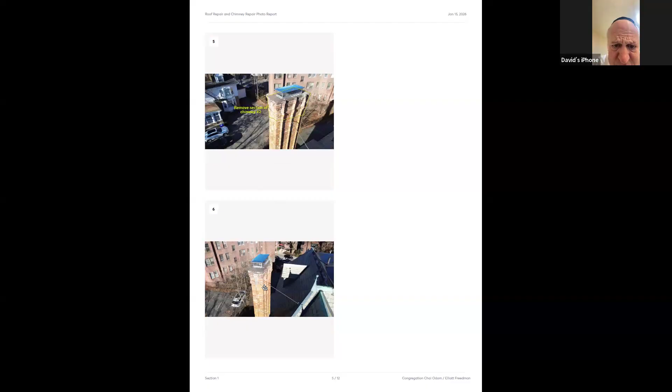You can see with the, what color line is that, Nick? I can't see on my screen, but it's a line it's going to be cut down to. Maybe what color line is that? Looks like yellow, a yellow line. I'm so sorry, yeah, I'm on my phone.

So we're cutting it down just a short bit. Now, I'll address the one that really needs to be cut down, which is the one on the side of the driveway. Even if they fix that and rebuilt it up, it still is a danger, and it has something holding it up, which is this metal thing.

This is a very old building. The purpose of these statutes and laws, as I've read them a little bit, is to preserve the beauty of the building. Now, if you can only see something from the sky, that doesn't fit into the purview of this committee, nor of this law. The other 2 chimneys are set back very much, and you can't see the entirety of them from the street. We didn't even know how bad it was until we got a zoom up there.

I assume this committee is not here to preserve something you can only see by Zoom. You want to preserve something you can see by the street. Now, the lower part of this can actually, strangely enough, be seen. The topography of this neighborhood is that the building is set up a little bit high, and the whole land of the building is high, and then it slopes in a couple of spots. So you can't see up that high no matter where you stand.

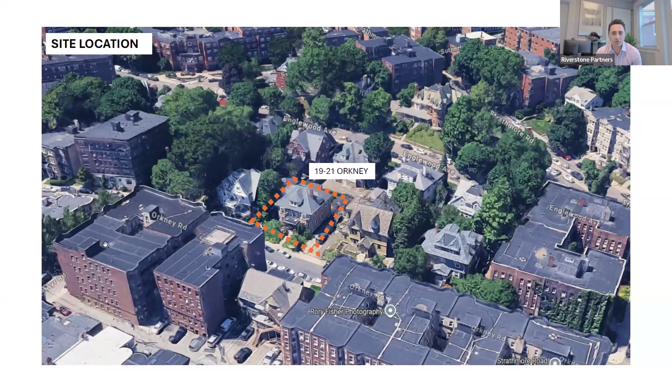Nick, you can just go through the slides. As you can see, it's a beautiful house that has been neglected for many years. The exterior siding, old windows, and there's some original features of the property that they maintained, and there are a lot of things that were added to it.

On the back side of the house, as you can see, there's a big red porch that has been built and a fire escape. These features are not visible from the public road from Orkney, and because this property is sitting a little bit lower than the street behind it, they are not visible features.

We do have, as you can see, a garage that has been used as a shed and is falling apart. Part of this application, we are requesting approval to remove that.

General notes about this project: the majority of the work we are doing is inside of the building. We are not doing any exterior demolition. We are not doing additions. We are not expanding the building, adding dormers or skylights.

As a resident of Brighton, somebody who has been in this area for several years, I understand the neighborhood very well, so everything we are proposing is to respect that.

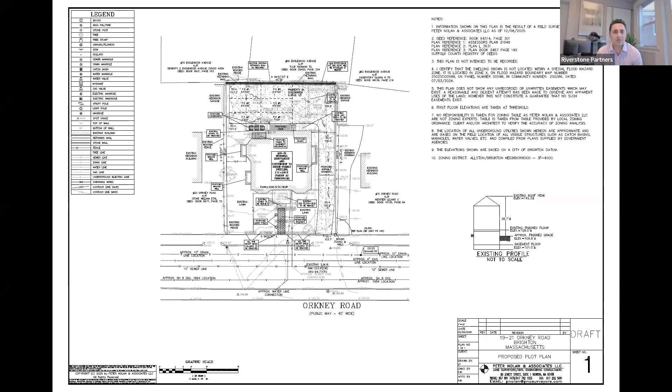This is the site plan, which basically shows that the building is going to stay as is. We do have a driveway that is located on the right side of the property. That driveway is going to stay, it gets resurfaced, and then that will be an opportunity for residents to park behind the building. Right now, behind the building, Nick, is it possible that you zoom in a little bit on the back side of the building?

Was this helpful? Yeah, this is great. So as you can see, back there right now, this doesn't show the overlay, but that red deck that you see, that's gonna get removed. And we will create some parking back there, which basically allows the residents to have some off-street parking in part of Brighton that is really hard to find parking.

The rest of the property is - if you can go back for a second, I just want to do a quick overview of that - the rest of the property is grass, we don't have any intentions to change it. As you can see on this landscape plan, we are showing a mulch bed around the property to make it look nicer and add some soft edging.

In the back side of the property, between our parking and the garages on both sides, we are showing a small landscaping strip to allow for some shrubs to be installed, generally just to improve the look of the property. But again, all of these are on the back of the property.

On the front, we do have a walkway to the house. It's concrete, so we would like to just replace that with pavers. We are showing lighting, there's some more details about that Nick can explain. Per Nick's recommendation, we are adding a native shade tree to the front left corner of the property, and then there's some existing vegetation that we're gonna maintain.

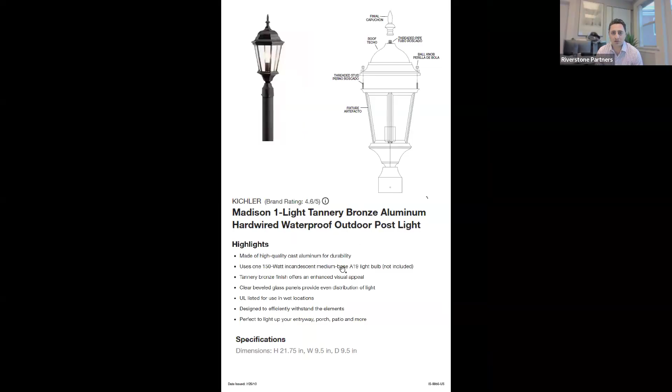Yeah, you can skip through these, they're just the specs we've shared. For windows, we've made a recommendation, and again we can talk about that. The roof is asphalt shingle, so nothing really to look at. The lights in the front—this is what I thought would be appropriate and would look nice along the front walkway, but again we don't have a preference. We can eliminate that scope or keep it, it's just a recommendation.

Nick, tell me what you think. I do have with me Chris Willander with James Hardie. Chris has done a lot of historic projects in several cities and towns. He has a presentation—if you feel it's appropriate now we can go through that, or you can read your recommendations first and then have Chris go through his presentation after.

All right, anything else, Ari, before we move forward? No. Okay, so let's stop there.

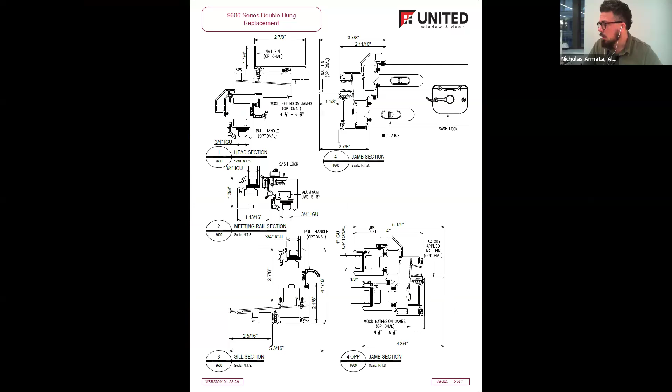Commissioners, if you're okay, I'll read my recommendations, which I've already presented to you, but we can go over them on the record. Then you can debate all of the individual components, and I will keep track of our comments here. When it comes time to vote, I know there are a lot of different elements to this project, so I'll keep track of everything one by one to make sure we get everything into the decision letter. Does that sound good, Sharon? Yes, it does, thank you.

Okay, so I'll do that now. 1921 Orkney Road: the structure is a two-story clapboard-clad colonial revival built around 1897, historically known as the Horace B. Fisher House. The property has seen several historically insensitive changes over the years, including but not limited to alteration of the front porch, addition of a metal fire escape at the rear, and removal of the original sidelights, replaced with architecturally inappropriate vinyl stock lights, to name a few. Regardless, the property still possesses a large degree of architectural integrity.

So now I'll go through all of the individual components Ari listed in this proposal. Number one, the window relocation on both sides of the facade—staff is recommending approval. When reviewing window relocation or changes, it's recommended that character-defining facades remain true to the existing character; however, it's staff's opinion that secondary facades, meaning the two side facades in this example, can be relocated to allow room for negotiation. In this case, these windows are not character-defining and the proposed relocation would be minimal. Additionally, there are no sister properties near this property, meaning the facades don't have to match adjacent properties.

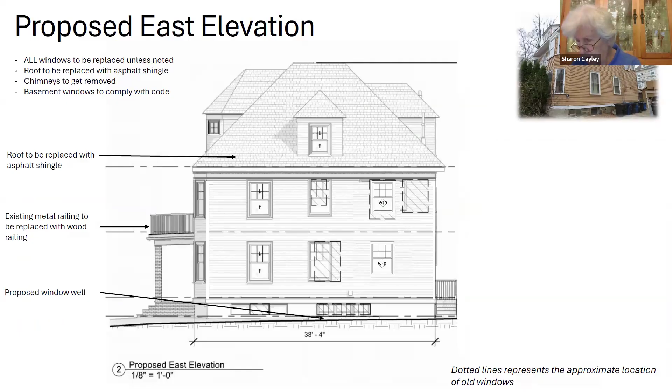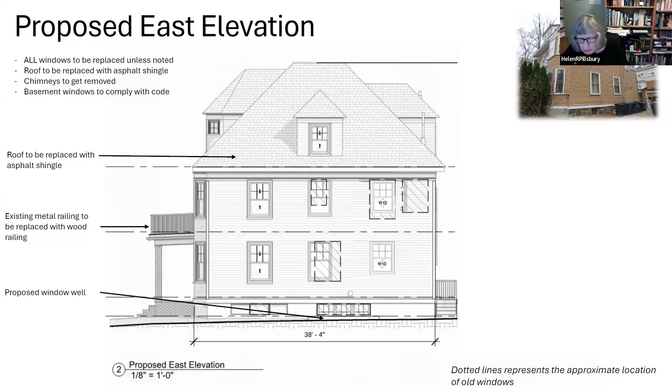But correct me if I'm wrong, other commissioners? I guess not to complicate things too much, but those window wells seem to be somewhat related to the placement of the driveway. That's kind of a separate issue, but to me they're interrelated. I don't know if we want to get into that now or wait till we've done all the facades of the house.

In concept, in terms of the well, are you comfortable with that right now, regardless of the driveway? Because then we can go to the driveway and discuss that after. Yeah, actually, I am personally comfortable with that. Let me solicit the other commissioners.

I think Helen and I are on the same page, because I was thinking the driveway and that sort of green strip that's next to the driveway. So as long as it doesn't interfere with that, we can discuss the driveway in a separate topic. Okay, great. So we discussed the east elevation.

Now let's move over to the rear elevation, which you could probably see glimpses of from Englewood, but there's also a lot of improvements on this side. Any comments or concerns about the rear elevation? No, none from me.

Will there be the red kind of deck that's in the existing conditions photograph? Will that be replaced by a small exit deck? Is that what I'm saying? That's what I saw. Exactly, Helen, you're accurate. And what are the materials of that deck? Because I don't know if that was specified.

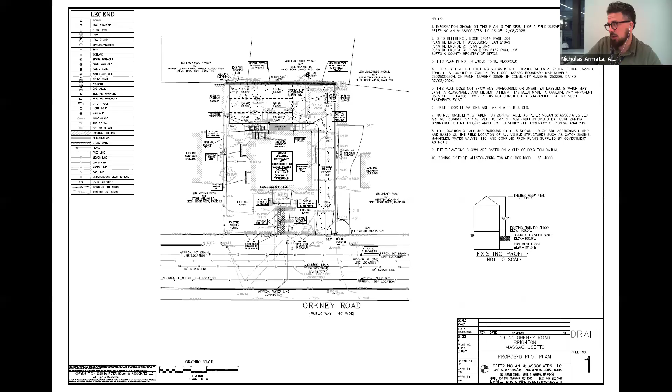Okay, so let's pivot to this facade, the west facade, which has one window relocation, then there's a window well here, and then also another window relocation on the basement level as well.

Well, I would observe two things, and it might not be big, but the window relocation lines up to some extent with the third story windows, so visually it's somewhat balanced. The other is that the window wells on that side appear to line up with the second floor windows, so if you're really looking at it very closely, it balances.

Good, just pointing out details here. So Ari has proposed, A, keeping the existing large tree, and B, shielding these wells from visibility from the street with several shrubs that will grow in over time. So that's another way of screening these wells as well.

Yeah, it's commendable to have as much planting as possible, given that in the last few years we've had some weather events that cause us to give greater attention to water runoff and where to put the snow when we get it.

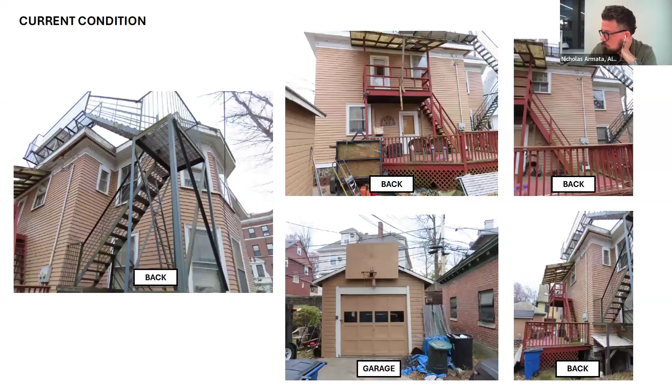So let me go to the best graphic to show here. There you go. Okay, Ed, you're suddenly muted. Okay, sorry.

I'd like to start the discussion by observing that the front door is the most prominent part as you approach the building, so as much as humanly possible, keeping it historically accurate is desirable. The side lights look like they've been added at some point in the last century, but not the best part. I realize fitting a door and side lights that aren't manufactured together can be difficult, but living in a place that's 100 years old myself, I know that nothing is ever level or plumb.

So it's a fact of life. In that case, I would like to recommend that the developer do whatever they can to get as historically accurate a door and side light as is humanly possible, and not a modern reproduction. That is, however, my observation. Commissioners, the floor is yours. I couldn't have said it better.

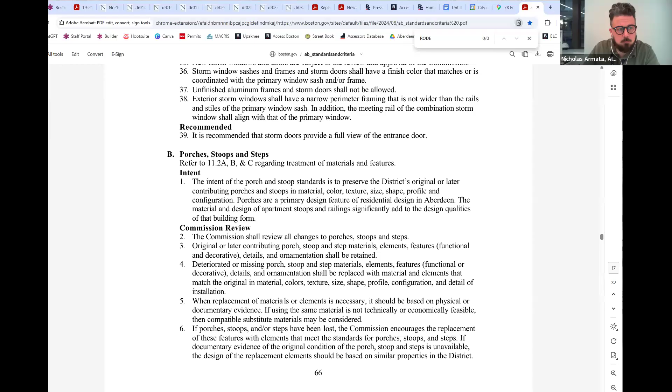Let's bring this up. Hang on one second. Share new screen. Ari, who was it that needs to unmute? I think his name here is Chris V1. Chris, you should be able to unmute yourself. It looks like he's on a phone. Is that the star? We'll unmute him. Star 6, correct.

There you go, perfect. Good evening. Evening.

Apologies here, my wife is traveling for business, so I have a one-year-old and a three-year-old alongside me that might be contributing if you hear any noise. But my name's Chris Valandre. I work for James Hardie Building Products. I've been working in the greater Boston area with Hardie Siding for the better part of the last 8 years.

I have run into my share of projects in historic neighborhoods, and I have been involved with a few other projects with Amir over the years, and I was helping him with this project, the design and all the different parts and pieces. You can continue to advance the slides here.

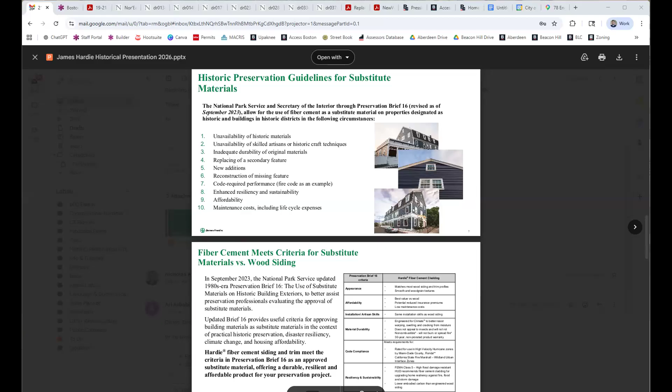If you go down a few more slides, these are local examples. This is a large commercial building in Medfield. There was one in Salem, one close by in Newton, Brookline. We were able to get Hardie approved on all of these. There's dozens more, but these were the most recent ones I had available. And then at the end, I included a case study down in Washington, D.C. Totally different market, but very historical, significant area in the Northeast. I wanted to include that for everyone to see.

Is that it, Chris? That's it, unless anybody has any questions.

Thank you. And commissioners, I want to clarify something Chris said, because he brings up a good point. The Secretary of Interior standards does allow for new alternative materials on a case-by-case basis. These are the new national standards for preservation. That being said, we have our own individual guidelines that explicitly lay out the preference for original materials, and also the ability to consider other materials on a case-by-case basis. So Chris, thank you so much for your input. Commissioners, any questions for Chris?

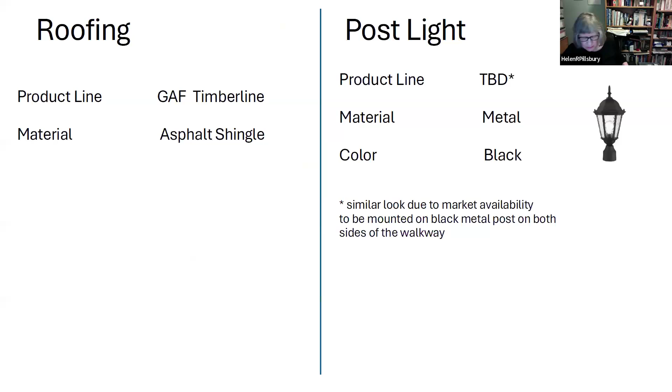So I think the next recommendation was to do 1 of them instead of 2. It's a pretty pleasant looking light, but I don't want to take up the commission's time on that. It just seems a little unbalanced to have those 2 poles on the right side, and a bit obtrusive of the view of the facade of the house. That's just my comment. Yeah, we can eliminate it or just make it 1 to simplify everybody's life.

I would like to recommend that we eliminate them. I don't think they're necessary since there are going to be porch lights.

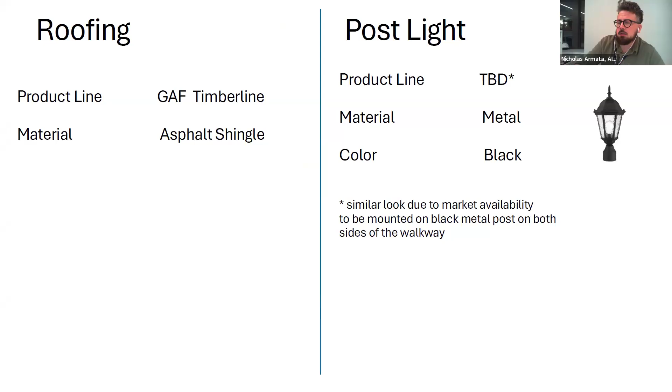Sure. All right. The description says on both sides of the walkway, but the drawing shows it on the same side. Yeah, that's a good catch. I apologize, this one is outdated.

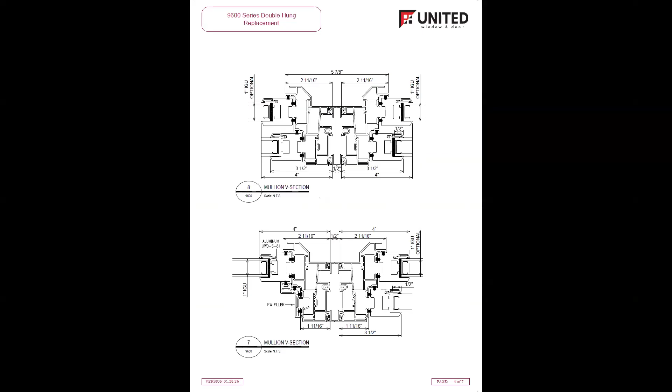Jesus Christ, I don't even know where to begin. I mean, I really don't. I'm too nervous because it's putting me on the clock. The whole format of the meeting is such that it disadvantages the commenters, the people who live next to this house and in the neighborhood. There should be at least a chat opportunity so people can drop a sentence or two that informs the conversation. Ava, this is how the state set this up. I'm here to help you, let's start with the things.

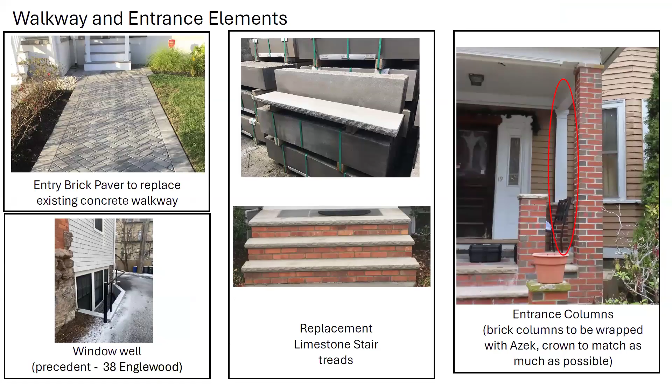Okay, all right. Can we see the slide? Can we see the slide on the front door, please? There are other issues that are more important to me as an abutter, but I care about the street and the front facade of this. And I think it would be a huge mistake, really an abomination, to leave the current, not original, sidelights that don't even fit in the original openings.

It's Helen's idea to essentially put new proper size panels, windows in the existing opening - that's a good alternative. But I just want to point out that the stoop of this entire door element, because originally it was one assembly, right? They ended up painting the sidelight parts white, but originally it was one assembly of the same color, and it was installed probably even as one assembly.

The stoop at the bottom is so worn that you cannot sell condos to people and stick them with a stoop that is totally worn out and where the door doesn't fit with the sidelights. It'll just look inappropriate, in my opinion. But I don't want to spend any more of my precious minutes on this. I just want to point out that inside this vestibule, and I was there a number of times, it's a tiny vestibule that's only 4 feet deep.

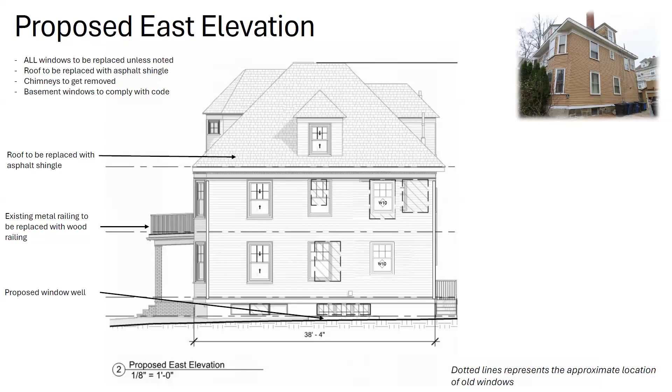Maybe we can move to that facade in the rear. Can we move to the facade? We were just arguing that we really would not like to have an additional window opening on our side, on this facade, which is visible from Englewood, and I walked there and could see that according to this drawing,

almost half of this facade will be totally blank and looking off balance. We are hoping that this window, which has always been there, can be retained, because it also allows future residents to look into the back where their cars will be parked.

And if there's anything going on, whether it's a fire - there was actually an instance of fire in the house behind, and it was stopped because our neighbors at that time saw that fire. So I'm asking, please, there's no reason to remove that window on the first floor of the rear.

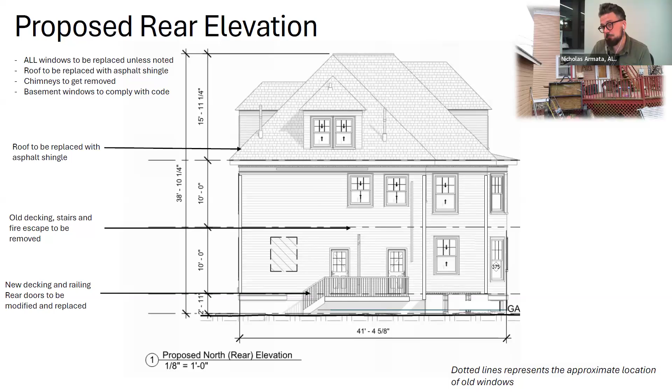Okay, I'm sorry, but Leland's comment made me realize I'm not clear about the trim material around windows or some of the other areas where there's trim. Do you want to elaborate?

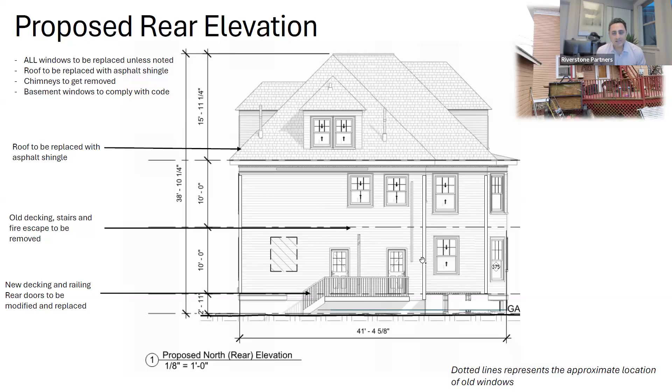Is that like the Aztec? I know I keep saying the wrong thing. Yeah, AZEK. It's an alternative to wood that nobody uses wood around windows for anymore because of water damage issues. The good thing about AZEK is there are different profiles, so we can find something that matches what's existing out there. It's commonly used for situations like this.

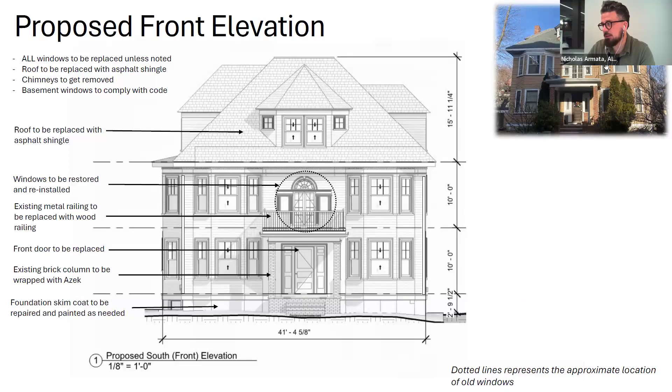What about the delicate dentil work on the upper trim areas near the roof line? Would that be able to be replicated identically? Because the commission will probably ask for that. Yes, and if we cannot replicate it, we will keep it and paint it.

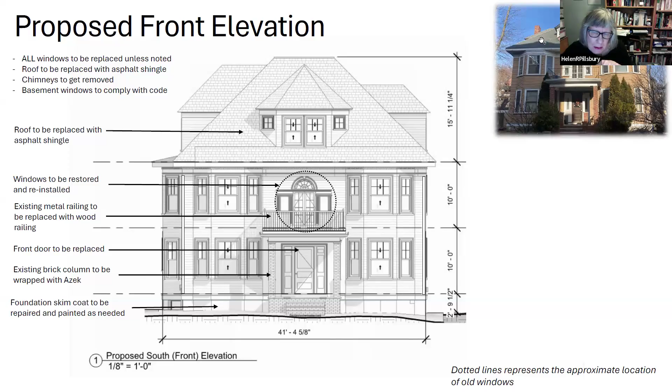I also want to ask, following from Eva's comment, about the windows flanking the double door windows under the Palladian half circle that she said are currently leaded glass. Is that true, and will that be retained or restored with leaded glass? That's an important detail. I'm not sure what they are, but we are going to restore them in kind. We'll have a historic window restoration company come in and basically do whatever is out there in kind. So if there are leaded glass windows, they will remain.

If leaded glass windows are still being built today at this time and age in New England, the window restorer will do that. But if it's a practice that has been phased out, then no, we can't replicate it.

And I want to add this: this is our house, we love it more than anybody else. So I understand the commission has opinions, but we care about our house and the look of our house more than anybody else. So if we are making a recommendation, it's truly what we want the house to look like.

Thank you. I just want to point out that a lot of our recommendations are based on guidelines and rules in place that we adhere to. So if a lot of the things sound arbitrary, it's because there are rules as far as materials and things like that. It's not even a matter of opinion, it's a matter of passing along to you what the guidelines and rules are about materials and things like that. Understood.

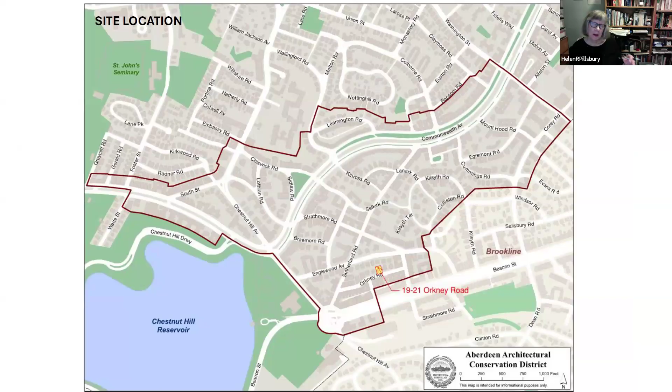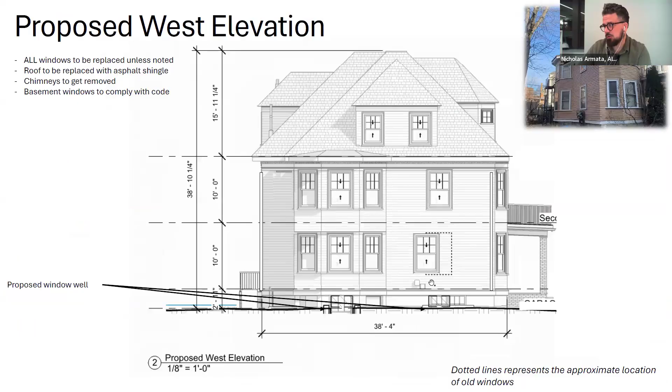But can we just specify, does that buffer come all the way to the street, or does it stop somewhere? In the public comments there was discussion about that. I don't think so - I think it came to the end of the residence, that was my recommendation from staff. And is there any paving separating those driveways, or is the pavement just brought up to the edge of the driveway?

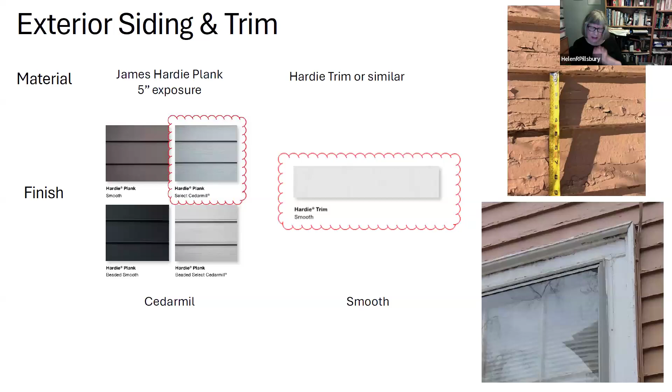Sorry, I don't follow. It was from the public comments. It was recommended to have a paver, because the driveway next door and this driveway are kind of next to each other, to have a paver in between. We didn't really discuss that, but I didn't want to leave it hanging. Wasn't that part of the discussion on the perceived angle of the driveway as it enters the street? But we were told by the developer that that is not the case - it's going to be a straight shot.

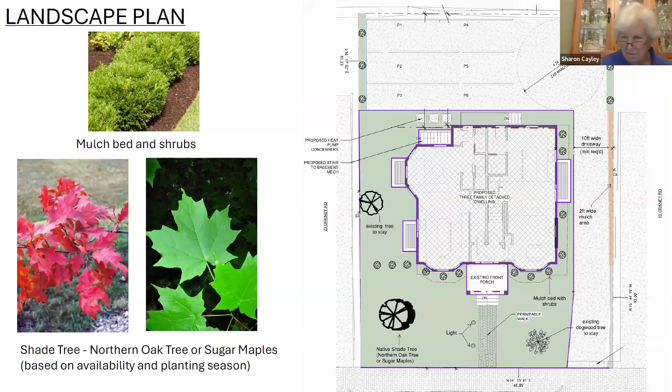That does it. That's great, Ari, you're all set. I will get this put together in a deliverable and send it over to you, and we will schedule that site visit for the Hardie board siding. Sounds good, thanks for everybody's time, it was a pleasure meeting you. Thank you for your time. Okay commissioners, don't go anywhere, we have a couple more things to take care of. Almost done though, thank you. Thanks, Ari.

All right, moving on to administrative review items.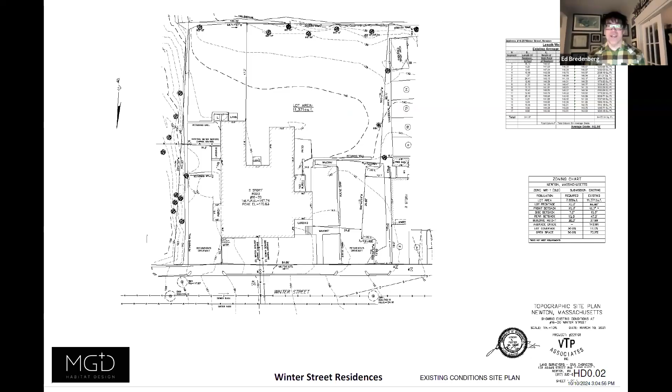Almost there. Appreciate everyone's time tonight. While you're finding it, I'd like to thank the members of the public for also chiming in. On a lot of things, I really take the public comment to heart, as far as materials and things like that.

Nicely said, Ed. All right, we have one administrative review item. It's application 25.0995, 8 Chiswick Road. Replace all 8 windows with 6/1 wood, simulated divided lights, with exterior and interior applied muntin bars. No low E glass, at a 6/1 grid pattern.

This is conforming, yes? Yes, ma'am. This property has done these before. Yeah. Okay, so all in favor? Oh, we need first and second. I'm sorry, I'm jumping ahead, getting late. I'll put forth a motion to approve it.

I'll second it. Sorry, and then public comment. If anyone has any comments on this application, raise your hand. Going once, going twice, none.

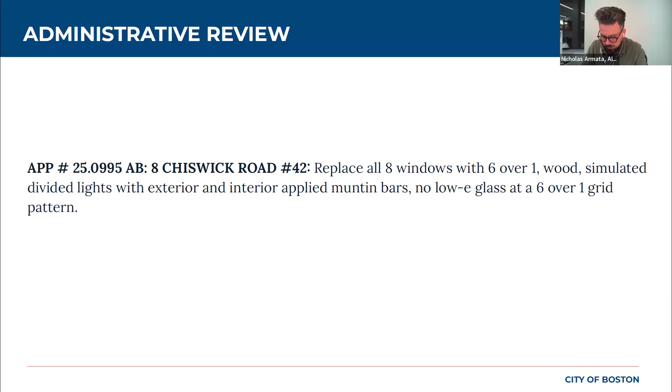Okay, so Ed, you were first. Sharon, you were second. Okay, and Helen, you agree? Yes. Aye. Okay, and Kirsten left. Abstain. Okay, good.

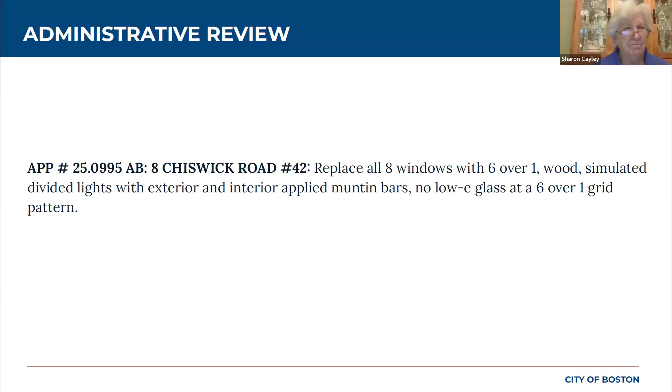All right, and staff updates, I don't really have any, it's been a busy week. That's it. Oh, there's my building with the 3-car center entrance. I thought that was your building. Yeah, oh wow, so okay.

And Nick, I want to thank you again for your guidance and patience. That's okay, this is a volunteer job, and I'm very thankful that you guys are still on board. Sharon, you did a fantastic job with a very complex one. You're much too kind, I would have lost half of those items. Well, I appreciate everyone's support, I knew it was going to be a job, but we've had a lot of easy meetings.

I have my condo's annual meeting tonight after this at 8 o'clock. Thank goodness it's not earlier than 8 or I would be late. You still have time for a nap. God, yeah. At least a cup of coffee. We did. All right.